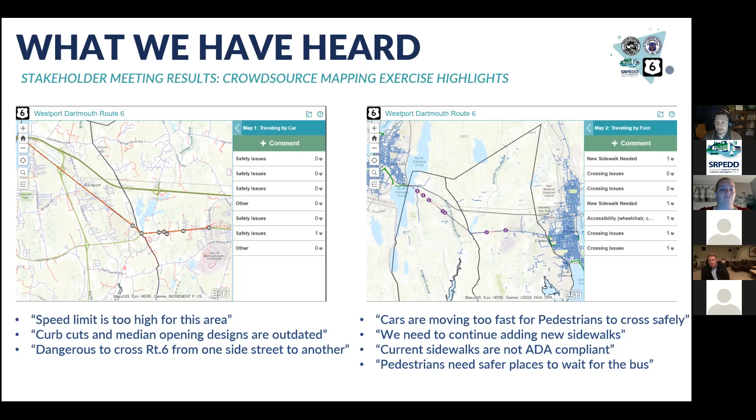To ensure that as many folks as possible could learn about the study and our workshops, we reached out to the public in a variety of ways. We established a project webpage for the corridor study, which you can find in the chat. By visiting the website, you can learn all about the purpose of the study, upcoming events, review current findings, view interactive maps, and participate in surveys. We posted flyers at local businesses along Route 6 and in both the Dartmouth and Westport town halls and local libraries. And lastly, we've also used social media to advertise both the study itself and the public workshops.

We do have some early findings that we'd like to share with you. As for the physical layout of the corridor, the travel lanes are average, varying roughly between 11 and 12 feet in width, which are appropriate for the corridor's current use given the number of buses and trucks traveling along the corridor. The width of the painted shoulder varies greatly, anywhere from less than a foot to as wide as 12 feet in some places.

Many of the catch basins are in need of clearing. For vehicle traffic, vehicle speeds along the corridor can make entering and exiting the roadway challenging and dangerous for people driving cars, let alone pedestrians and people riding bikes.

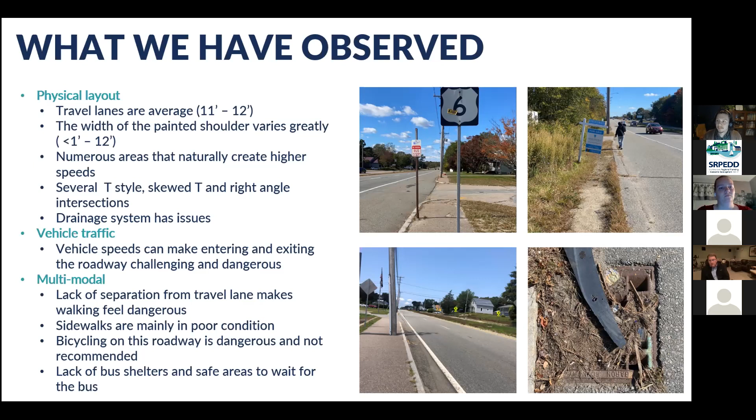Now I'm going to turn things over to my colleague, Sarah Brown, so she can present some maps she has prepared for you all today to explain some of the existing conditions along the corridor. Thank you, Greg. This first map shows the intersections that Greg mentioned earlier in the presentation.

So we have 5 stop-controlled intersections at Old Bedford Road, Borden Street, Forge Road, Highland Avenue, and American Legion Highway, which is also Route 177. There are 4 signalized intersections: Sanford Road, Gifford Road / Davis Road, Reed Road, and Cross Road.

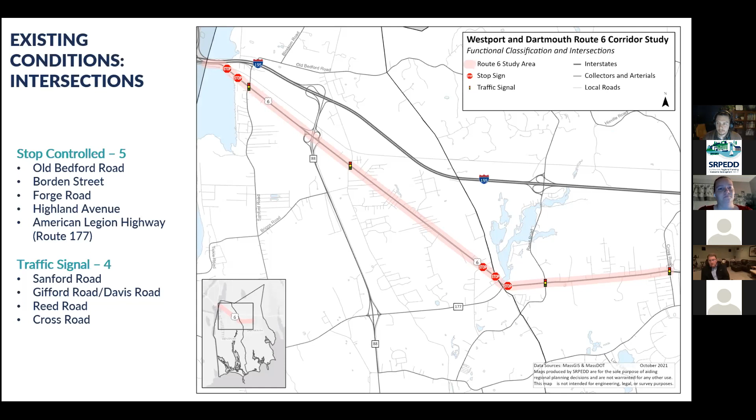This next map shows the traffic volumes. In August, we put out traffic counters along the route for about a week at a time at each location. The first piece of data here is the average daily travel for both the westbound and eastbound combined. As you can see, Westport has about a total average daily travel between 10,000 and 12,000 cars per day, and as you go toward Dartmouth, there's a higher level of traffic volume.

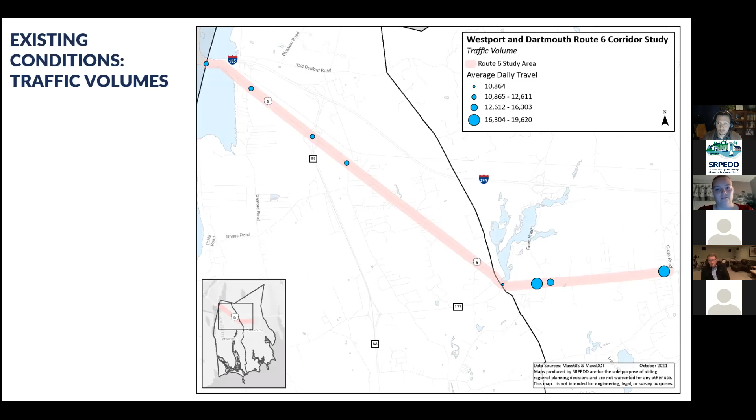This next map shows the 85th percentile speed. The 85th percentile is the speed at or below which 85% of all vehicles are observed to travel under free-flowing conditions past the traffic counter. As you notice, the highest speed traveled is underneath the Route 88 overpass in Westport, with lower speeds in Dartmouth. This is because we put the traffic counters just before and just after the intersection, so people are still trying to get up to speed or they're slowing down for the intersection.

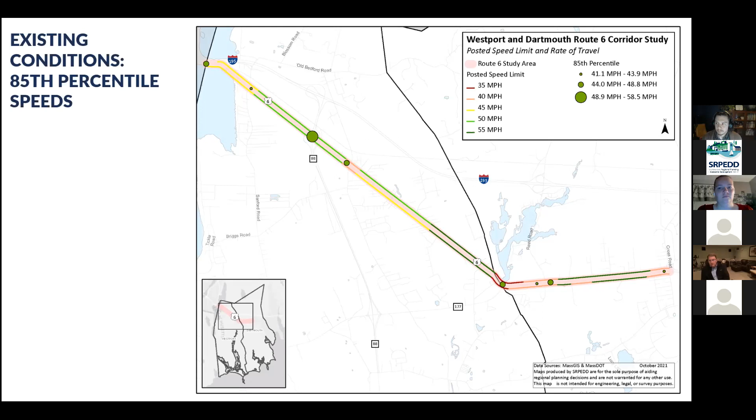This next map shows the crash severity of crashes in the Dartmouth section of Route 6. Between 2017 and 2019, there were a total of 145 crashes. 57% were property damage only, 39% had injuries, 1% were fatal, and 3% were either not reported or unknown.

Some notable crashes we saw: 2 involved pedestrians or bicyclists, 22% were single vehicle crashes, 8% of crashes were with a utility pole, 10 crashes were due to road conditions such as ice, wet roads, or snow, and 18 crashes were due to people following too closely.

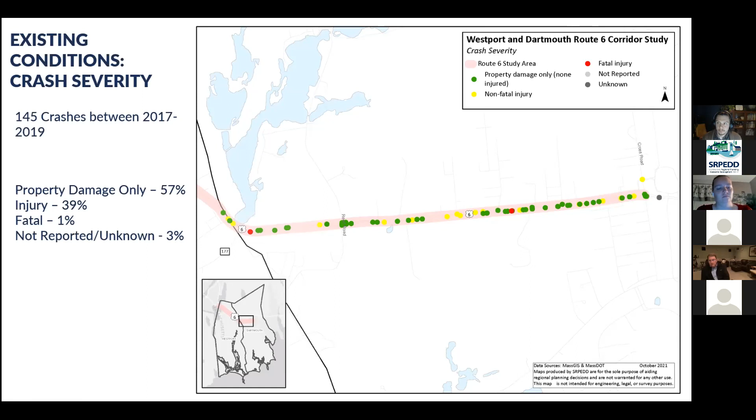This next map shows the crash rate at the 3 intersections in Dartmouth, along with the posted speed limit. Red indicates slower speeds and green indicates faster speeds. The lowest crash rate happened at Route 177 and Route 6, with only 4 crashes over the 3 years, resulting in a lower crash rate. The most crashes happened at Cross Road and Route 6, with 26 crashes, resulting in an 8.7 crash rate. These 3 intersections resulted in 50 crashes, 14 of them non-fatal, with no fatality crashes at these intersections.

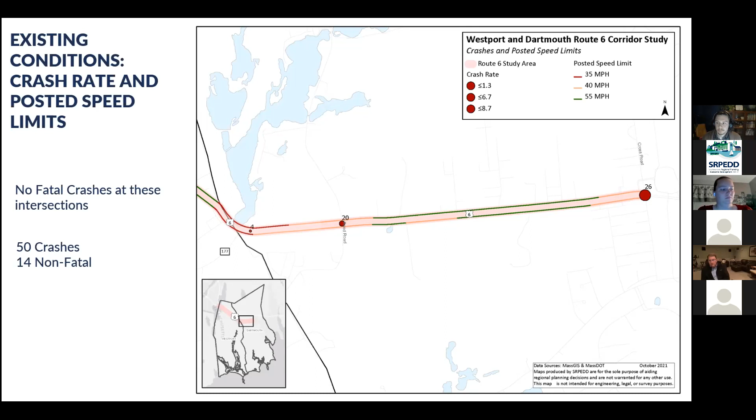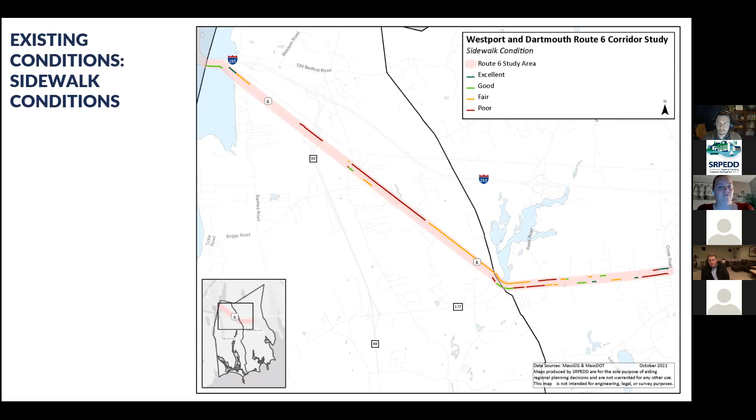The top three land uses along Route 6: 27% is institutional. This includes town of Westport land, town of Dartmouth land, some land owned by the city of Fall River, some churches, and the Westport Land Conservation, which owns some land along this road.

Then 21.9% is commercial properties, making up 109 parcels along this route. The next highest is vacant, at 17.8%. These three land use types make up 66% of the categories throughout the corridor. The rest, such as residential, mixed use, office, and industrial, make up the other 33.3%.

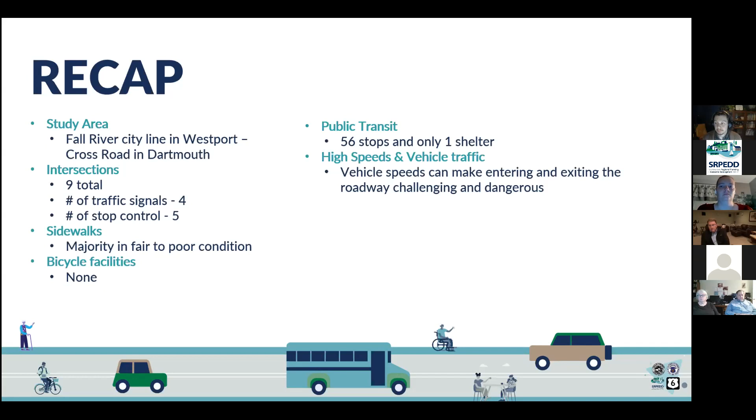Now for the main event. Let's explore any current or potential issues and opportunities along the corridor.

At this time, feel free to turn your videos back on because we're entering the participatory portion of the night. We're going to explore those current or potential issues and opportunities by discussing issues you might have or have witnessed while traveling along the corridor, and some ideas you have for the future of the corridor.

Then by utilizing our crowdsource map to place points along the corridor, we can highlight location-specific issues faced by motorists, pedestrians, people riding bicycles, transit users, and overall transportation impacts. But let's start with collecting some issues and ideas.

This exercise will work by you all raising your hands as you have an issue or an idea you'd like to point out, and I'll place your suggestion accordingly. Feel free to chime in if you've encountered the same issue or had the same idea as someone else. There's nothing wrong with saying the same thing twice—it just helps us drive the point home.

Once you've shared all your ideas with us, we're going to use those ideas to create a survey to rank the importance of all the issues and ideas, so we can make recommendations to the town based on your feedback. So I provided a couple of simple examples just to kick things off.

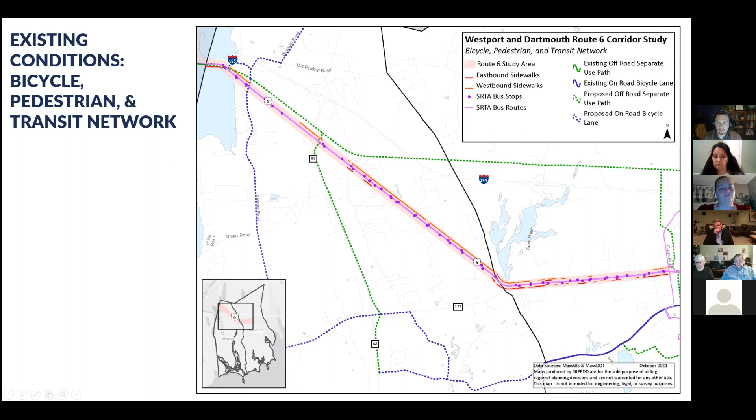That is also part of the South Coast Bikeway study being done by Circuit. Yes, it is, and it was found to be too costly, and the fact that it's still in use is an obstacle. Massachusetts does allow for bike trails alongside active rails, however the conditions there with river crossings, narrow land, and wetlands would not be cost effective. Okay, we are looking at a northern route, which is further north from there.

Hey Greg, this is Kevin Estes. Hi there Kevin, how are you? Good. Welcome, thanks. I had a question. I sit on the planning board for Dartmouth, and the question that I wanted to ask was...

When we talk about crossings, what kind of crossings are preferred for pedestrians as well as bikers? Are we talking about a bridge? Are we talking about a stop light, or just more stop lights? Or what would make the most sense, or what are some ideas that people have that they would like to see?

Would you like to put that question to the rest of the participants here, Kevin, or would you like SRPEDD to answer that question? Both. Well, I'd love to hear from some of the folks participating tonight first before we chime in with our opinions, of which you can be assured we have some.

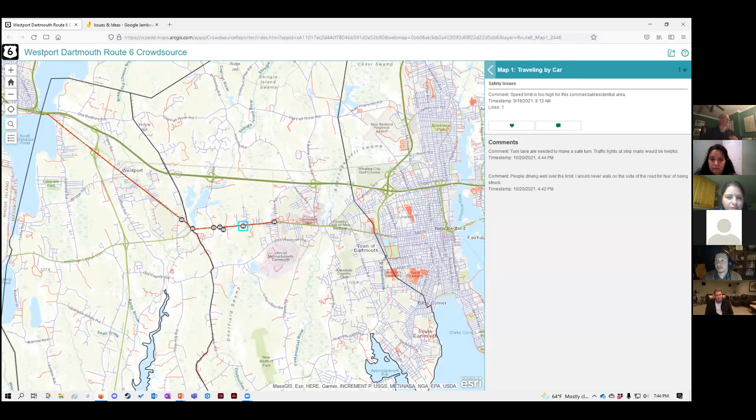So I can give an example of that if it helps. I can illustrate with a couple of points here. Like this one - speed limit is too high for this commercial and residential area, and that's located right here.

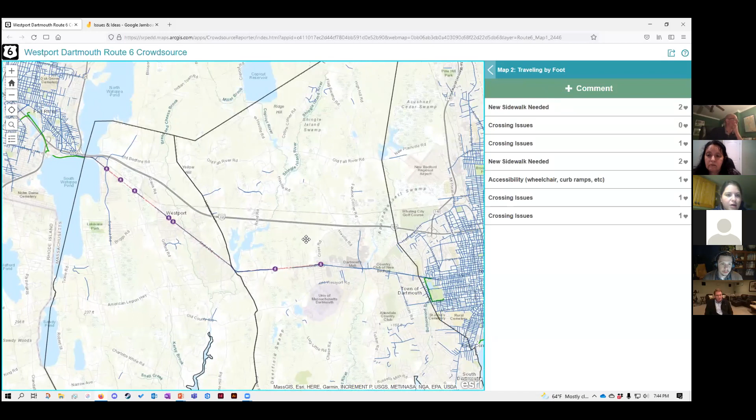My comment would be that from Reed Road to Cross Road, in my observation, seems to be the area where the most attention should be focused on pedestrian crossings, talking about the entire corridor. I don't know if you just want a general pin, but I think we could all agree that seems to be the problematic area with regards to pedestrian crossing. Sure, anywhere in particular? I could just throw it smack dab in the middle. Yeah, it doesn't matter.

Elizabeth, just to add to that comment - you're right, and there's probably about 200 units coming online just to the left of... well, you're not going to see my mouse here, but let's see, right across from East Quarry Street. So Greg, if you zoom in... sorry, let me just... okay, alright, sweet, I can move both at the same time.

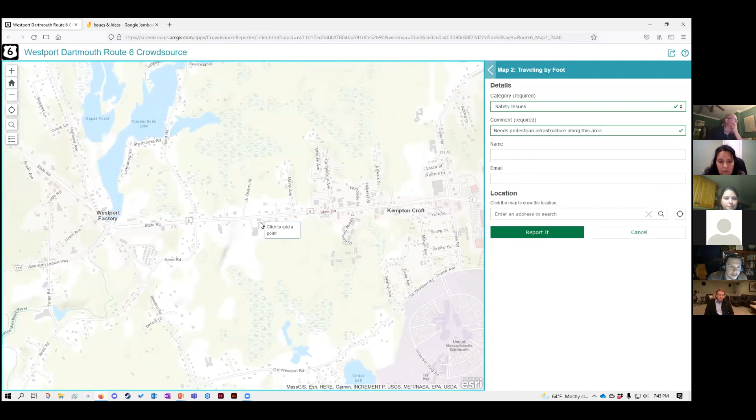This is great. So you said East Quarry Street? Just over it, you were right on it. Yeah, left a little bit further, right there, and down - those two specks right there below the mouse. That's the area of a potential housing development right now that may bring on 200 to 200 plus units. So when you talk about pedestrian traffic, you're going to have to do something in there. Absolutely.

You know, I think it's worth noting the college community. I find it odd sometimes that I don't see a lot of younger pedestrians that seem to be coming from UMass Dartmouth. I wonder if we could make that Cross Road intersection more conducive to them feeling comfortable crossing over from the university on, I think that's Old County Road, or Old Country Road, and then going along Cross Road over to that area and being able to access those businesses - something to consider for the future too.

If I may add, this is Sandra again. There are bike lanes on Cross Road, and there are plans to realign the entrance for UMass Dartmouth so that it is opposite Cross Road rather than where it is now, to make it safer. So once they get to Route 6, it would be nice if they could continue on their bicycle.

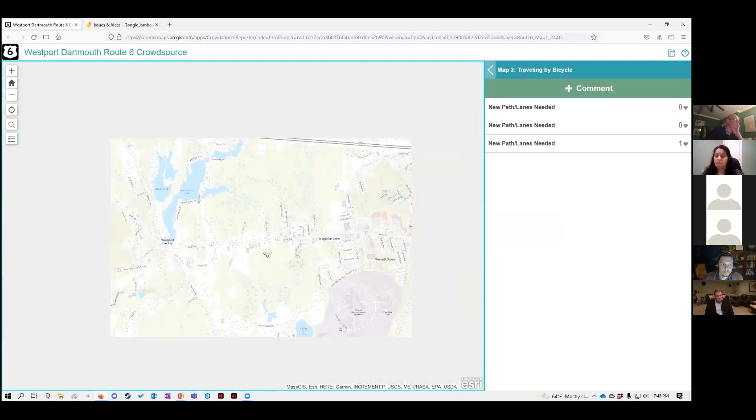There's also a UMass building in Westport along the South Watuppa. So if they could get safely between the university and the other location, the satellite location, by bicycle or bus on that Route 6 corridor, where it was more attractive and readily available to bus that way, that would certainly help.

Sandra, were you referencing over here along Route 6 by the South Watuppa? Yeah, right in the green section, I would say that's completed. There's a bike path behind it near Martine Street. Yeah, there's a UMass building in there.

Correct me if I'm wrong, but I believe it's right near that Martine, or the one a little bit further to your left, the bigger building there. So one of these buildings. Yeah.

I actually can't recall at this moment. It might be where you are, Gregory, maybe just a little bit. Nope, to the right, I think. Yeah, I think that might be the one. Think right there, the technology center, I think it is. Yeah, right? Oh, that's you. Okay, yeah. Now that you say technology center, I've definitely seen that signage.

Yeah, the South Coast Bikeway has mentioned that more than once, or discussed it more than once, to make it possible for the UMass students to get to the various campuses, the law school on Faunce Corner Road, and the art building downtown New Bedford, and there's also one in South End of New Bedford. Yeah, the Star Store.

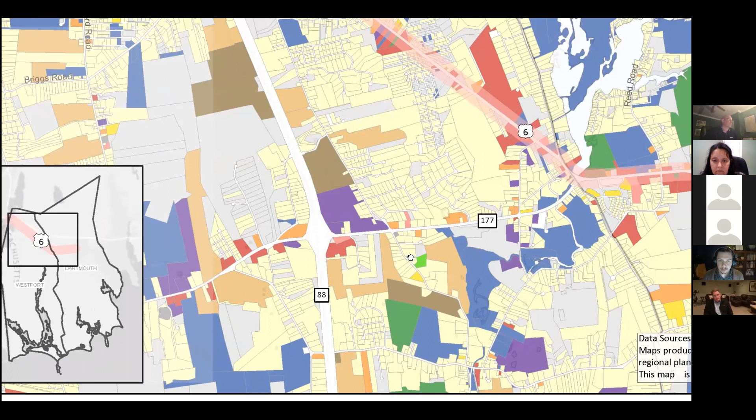I can move around. Unfortunately, a lot of the roads, except for the primary ones, aren't labeled. And it was gray, correct?

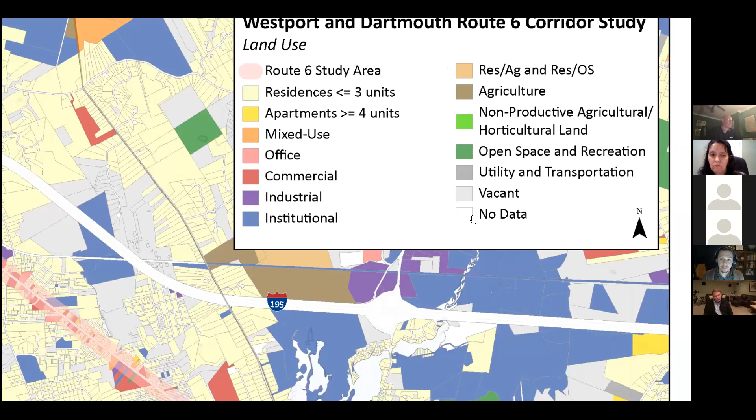What was gray? The area in question? Open space, the undeveloped area was gray. Vacant is gray, open space is green. Okay, no, vacant is what I want. So vacant is currently gray.

So you can see that there are some gray areas along this side. By vacant, you mean undeveloped, right? Yes, because there were buildings that are closed up, but those are considered developed.

I don't know if this is out of the scope, but do you know who owns those two large green protected open space properties? The town may be involved - that one there is town-owned property. Those two to the right of Reed Road, I believe, well, that's actually pretty south. I'm not certain, I can't confirm that, but I know DNRT does have some stake close to there. And I believe the property closest to the Route 6 intersection with Reed Road is town-owned property.

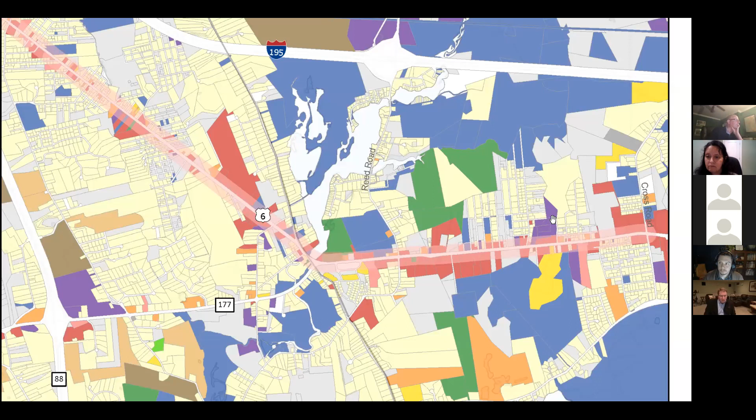Is that empty restaurant ever going to be developed? There are plans, yeah. Same use? I don't know at this point. Are you referring to the steakhouse? Yes. I heard there's plans too, but I don't know what though.

So, those lots are privately owned. Just looking at the one to the right of North Quarry Street - privately owned, same owner. Grossman Companies out of Quincy owns the big one directly across the street. The other big ones on the side are privately owned also.

Thanks for that follow-up, Chris. Yeah.